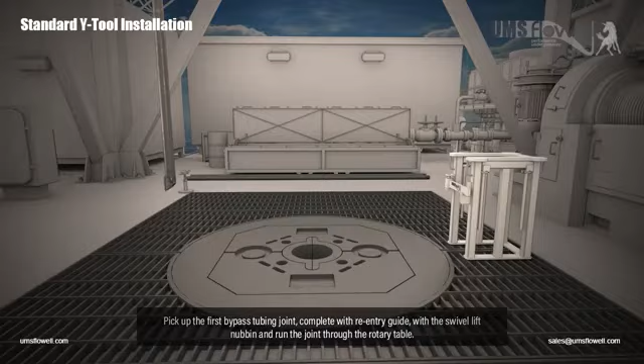Pick up the first bypass tubing joint, complete with re-entry guide, with the swivel lift nubbin, and run the joint through the rotary table. Open the front gate on the work table, and move it into position as shown. Adjust the bypass tubing joint height, so that the indicator mark is approximately 1 foot above the top surface of the table.

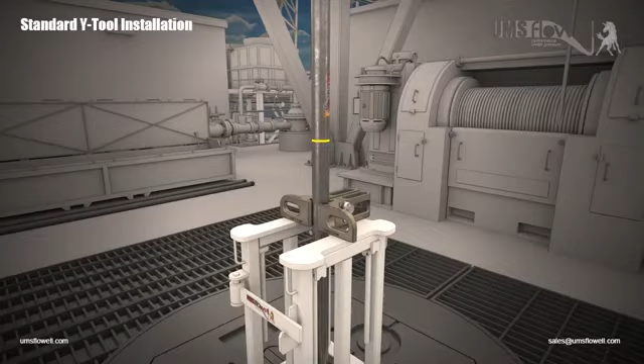Fit the bypass safety clamp onto the bypass joint as shown. Remove the swivel lift nubbin. Use a lifting clamp to pick up the first ESP section, which consists of the motor, ESP gauge, and motor base plug. Position the motor alongside the bypass tubing, and orientate such that the vertical bypass line drawn on the motor is aligned correctly with the bypass tubing.

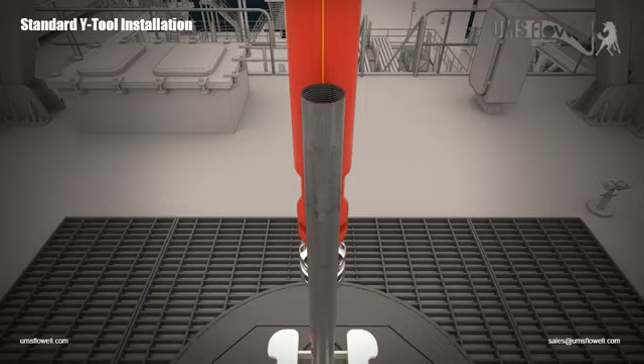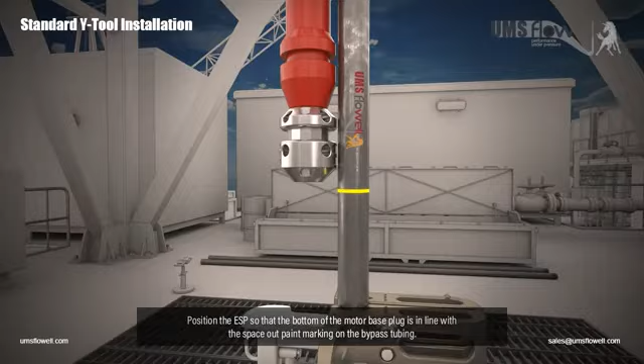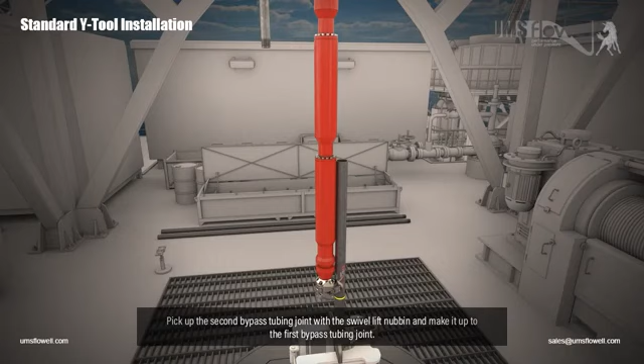Position the ESP so that the bottom of the motor base plug is in line with the space-out paint marking on the bypass tubing. Fit the first bypass tubing clamp to the motor base plug. Pick up the second bypass tubing joint, with the swivel lift nubbin, and make it up to the first bypass tubing joint.

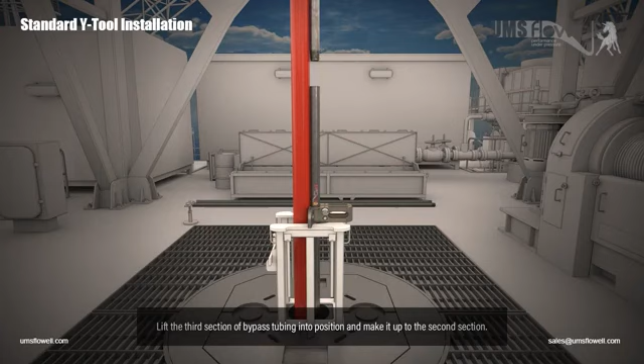Remove the bypass safety clamp. Lower the bypass tubing and ESP simultaneously, until the end of the second section of bypass tubing is at working height. Fit the bypass safety clamp to the second section of bypass tubing. Remove the swivel lift nubbin from the second section of bypass tubing. Lift the third section of bypass tubing into position, and make it up to the second section.

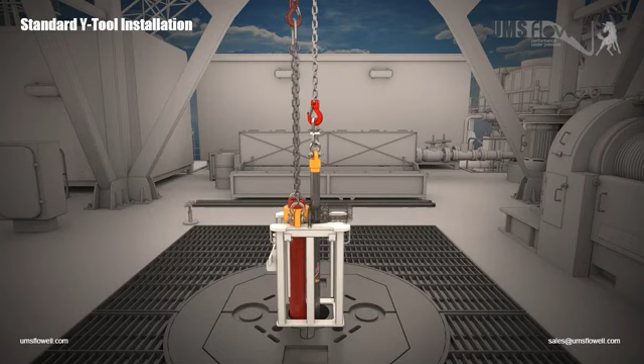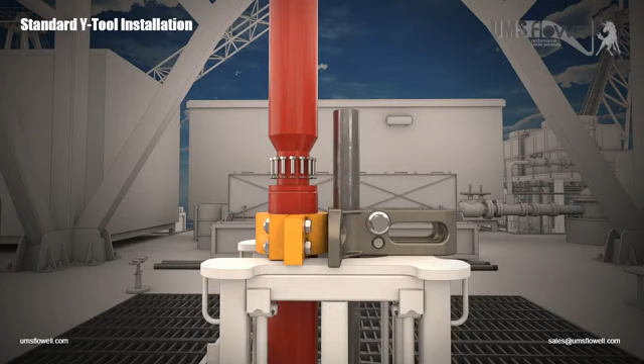Remove the bypass safety clamp. Lower the bypass tubing and ESP simultaneously, until the ESP lift clamp lands on the work table. Refit the bypass safety clamp. Remove the swivel lift nubbin. Pick up the second section of ESP, and install it onto the first section. Lift the fourth section of bypass tubing into position, and make up.

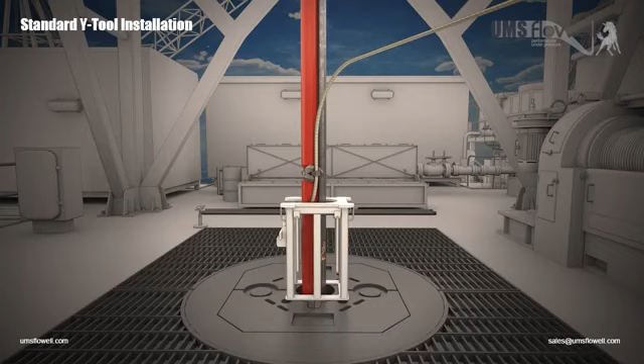Remove the ESP clamp. Install the MLE cable. Install the second bypass tubing clamp, and retain the MLE cable. Remove the bypass safety clamp. Lower the entire assembly downward, until the next bypass tubing clamp position is at working height. Install the third bypass tubing clamp, and retain the MLE cable.

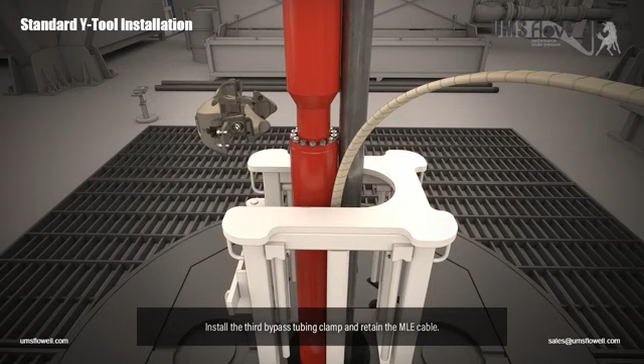Continue to lower the assembly, until the fourth section of bypass tubing is at working height, relative to the table. Refit the bypass safety clamp. Remove the swivel lift nubbin, and install the fifth section of bypass tubing. Remove the bypass safety clamp. With the fifth section of bypass tubing successfully installed, lower the entire assembly, until the ESP clamp lands on the table.

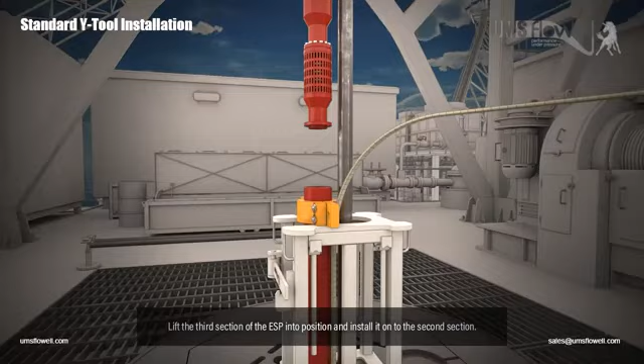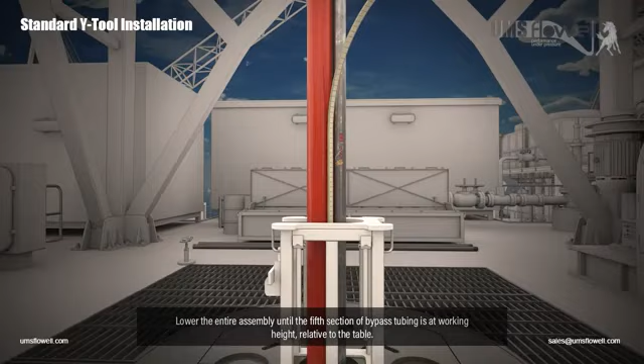Lift the third section of the ESP into position, and install it onto the second section. Remove the ESP clamp. Install the fourth bypass tubing clamp, and retain the MLE cable. Lower the entire assembly, until the fifth section of bypass tubing is at working height, relative to the table. Refit the bypass safety clamp. Remove the swivel lift nubbin from the fifth section of bypass tubing. Lift the sixth and final section of bypass tubing into position, and make up.

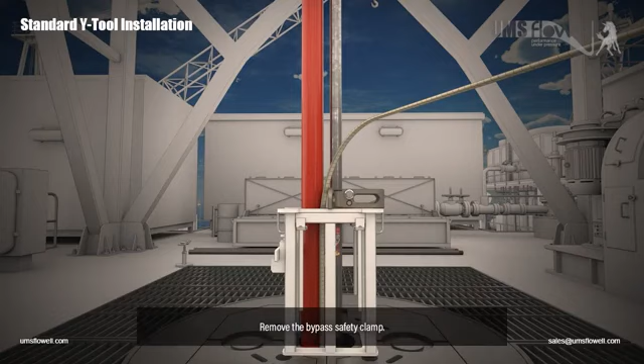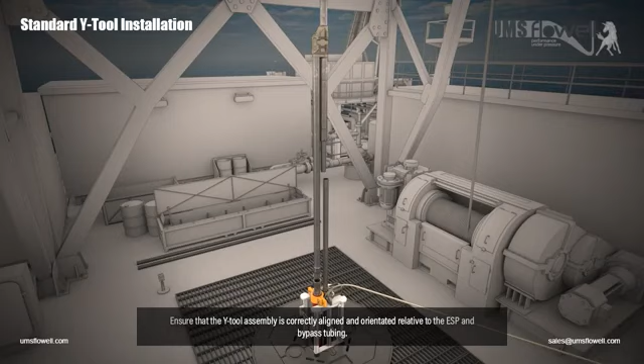Remove the bypass safety clamp. Lower the entire assembly, until the ESP clamp lands on the table. Refit the bypass safety clamp, and remove the swivel lift nubbin from the bypass tubing. Pick up the Y-tool assembly. Ensure that the Y-tool assembly is correctly aligned and orientated, relative to the ESP and bypass tubing. Lower the Y-tool assembly, and make up the discharge head to the pump head. Remove the ESP clamp.

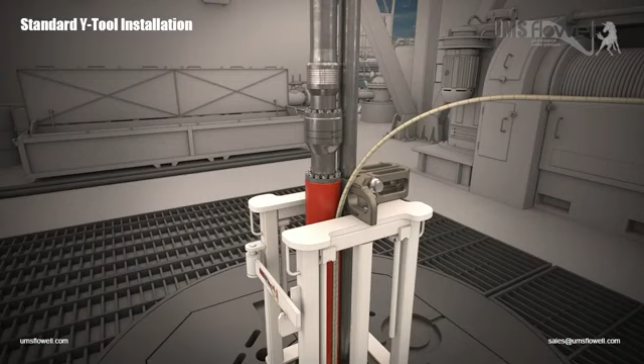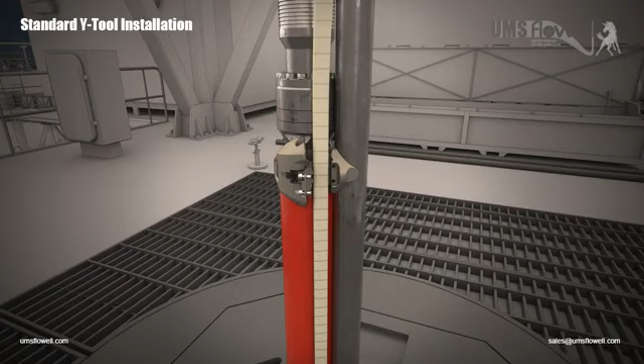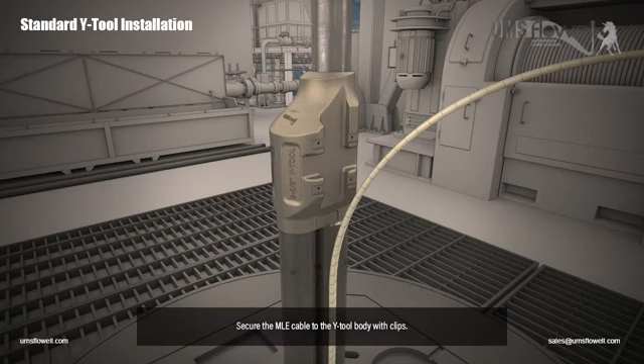Make up the telescopic swivel joint to the bypass tubing. Remove the bypass safety clamp. Remove the ESP worktable. Fit the final bypass tubing clamp onto the discharge head neck, and retain the MLE cable. Lower the Y-tool body to a working height. Secure the MLE cable to the Y-tool body with clips. Continue to run in the hole, and secure with slips.